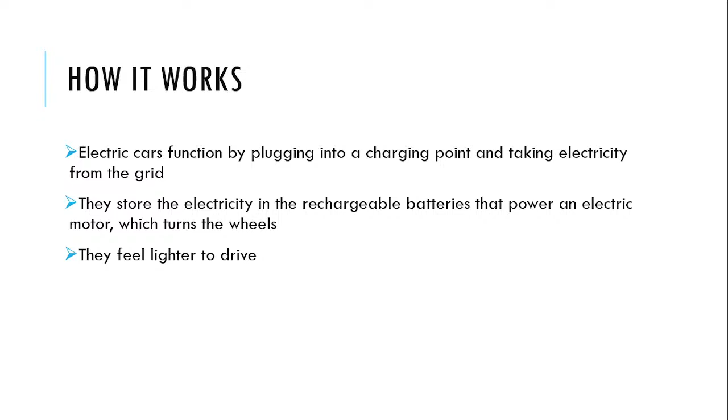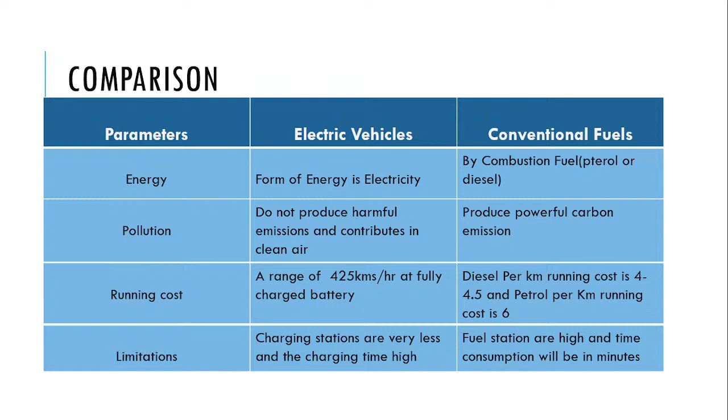Types of EV: there are basically 4 types - battery electric vehicle, hybrid electric vehicle, plug-in hybrid electric vehicle, and fuel cell electric vehicle.

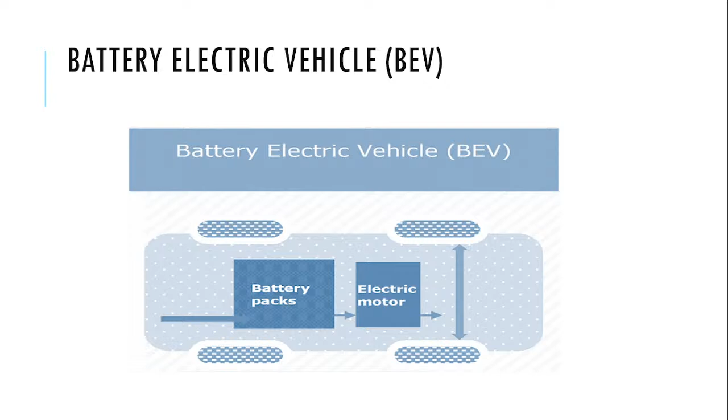This is battery electric vehicle. It has battery packs and an electric motor. Battery electric vehicle is also known as all-electric vehicle. It runs entirely on battery power. Electricity is stored in a large battery which is used to run the electric vehicle, and the electricity can be applied to the motor and used to rotate the wheels by the controller. The battery pack is connected to one or two motors in the vehicle.

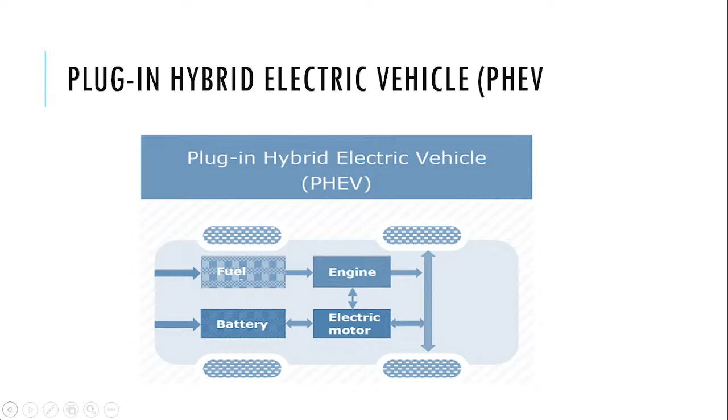This is plug-in hybrid electric vehicle, also known as series hybrid. It has both an engine and a motor. You can choose among fuels such as petrol, which is conventional fuel, or alternative fuel like biodiesel. The battery can be charged externally.

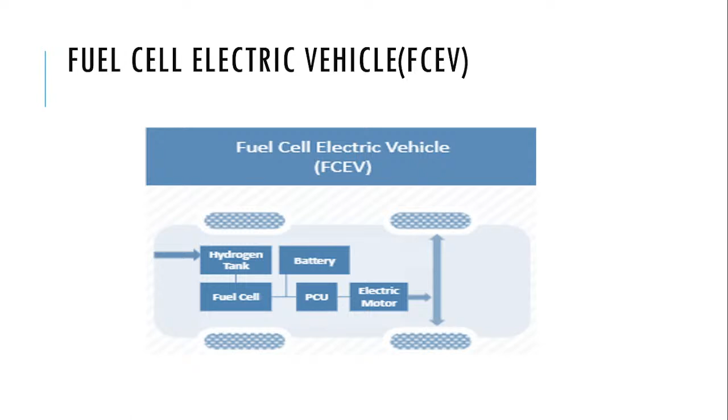This is fuel cell electric vehicle, FCEV, also known as zero emission vehicle. They employ fuel cell technology to generate the electricity required to run the vehicle. Chemical energy is directly converted into electric energy. With the electric energy, it is given to the power battery, and the battery is connected to the power controlling unit and electric motor.

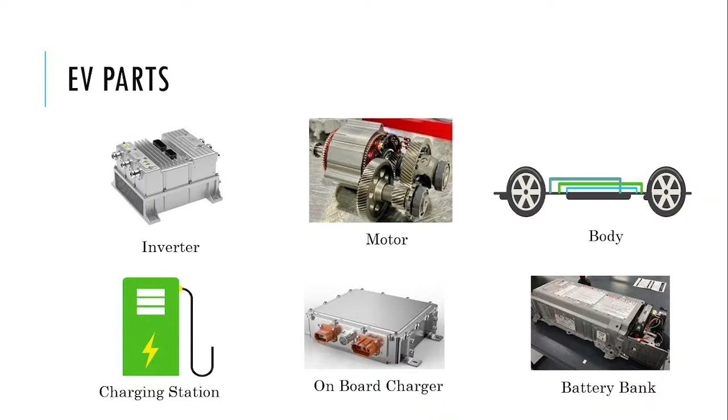This is inverter. Inverter is about conversion of DC to AC, and a motor to run the vehicle. This is the body, the transmission of the vehicle. Charging station will be connected to the onboard charger and the battery bank. From the charging station to onboard charger, the battery will store the DC energy.

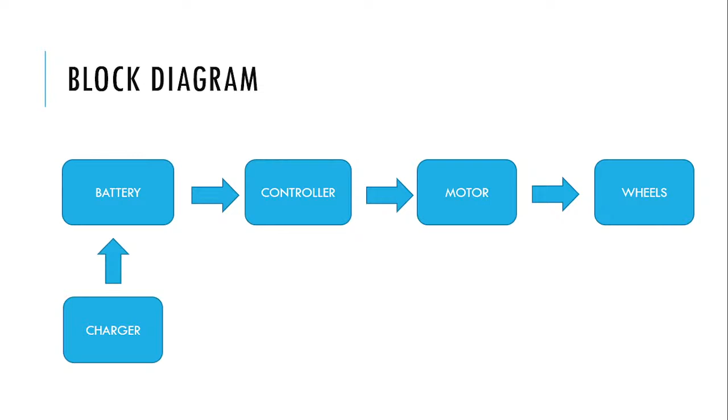This is the block diagram of EV: a charger, a battery, a controller, motor and wheels. Charger is connected to the battery. From battery, it will be supplied to the controller. From controller, we can control the motor and the wheels.

Basically, 80 to 90% in EV is power electronics. Power electronics deals with the design, control and conversion of power in electrical form. A system which converts electric energy to an electric load through a control circuit is known as power electronics. It controls and converts electric power from one form into another form.

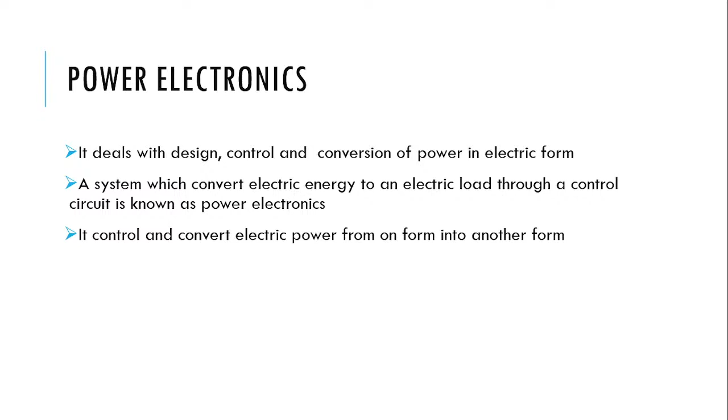Generally, there are power electronic switches like MOSFET, IGBT, SCR and thyristor. MOSFET is a metal oxide semiconductor field effect transistor. It has 3 terminals: gate, drain and source. IGBT is an insulated gate bipolar transistor. SCR is a rectifier, silicon controlled rectifier, and a thyristor.

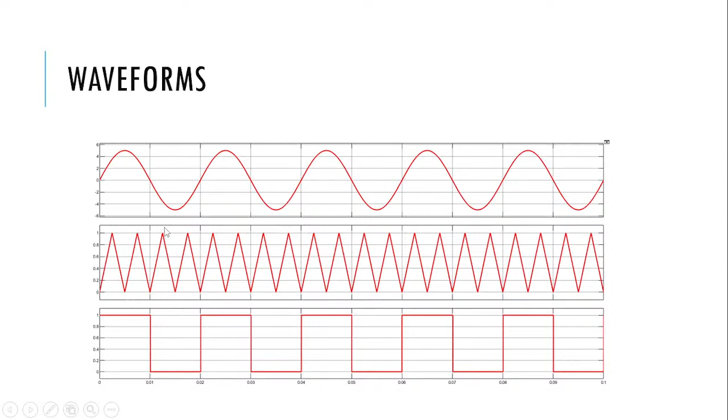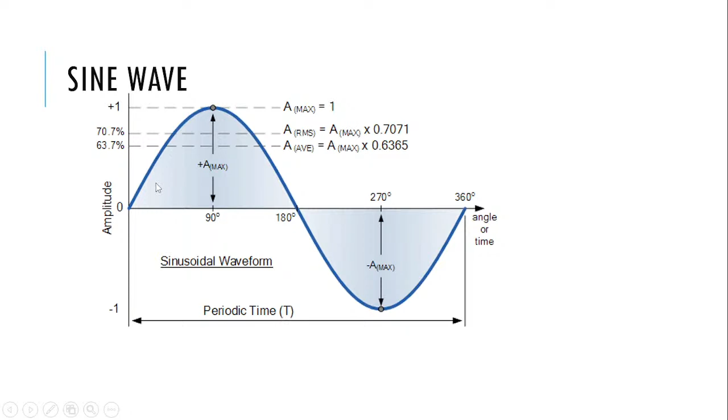This is the sine wave, also known as AC wave. The top, 0 to 180, is in the positive region, and the bottom, 180 to 360, is in the negative region. The sine wave has both positive and negative regions. 0 to 360 degrees is one cycle.

For one cycle, the time is 1 by 50. 1 by 50 is nothing but T equals 1 by frequency. Frequency is a standard frequency; for India the standard frequency is 50. 1 divided by 50 is 20 milliseconds. In most countries the standard frequency is 50 only, though from country to country it will differ - it will be 50 or 60. In India, we have 50 frequency.

Which is the most dangerous wave, AC or DC? Can anybody comment in the live chat? Can anyone say the answer - which is more dangerous, AC or DC?

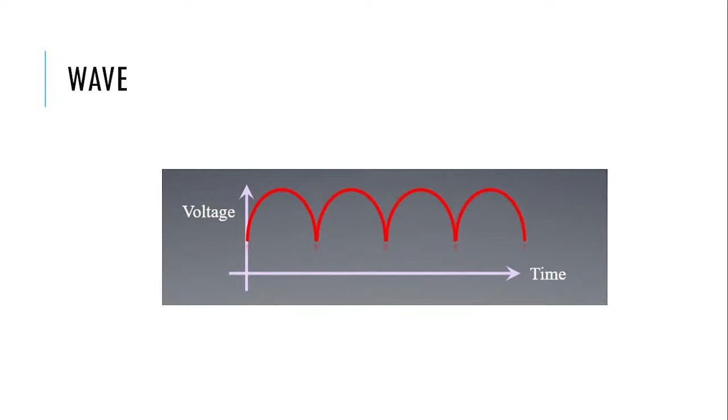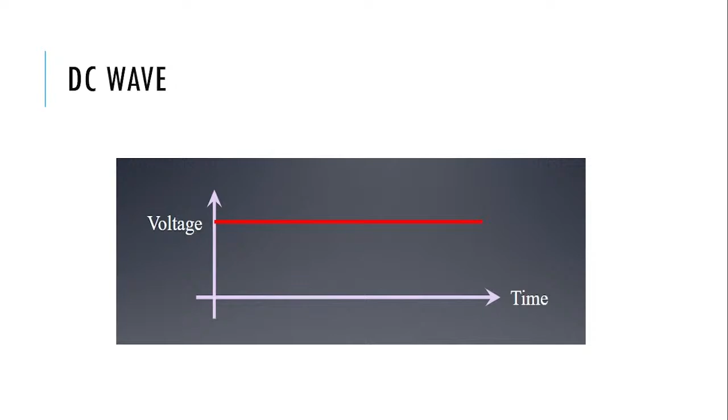In this DC wave we can easily find out the average value, but in a sine wave it is not possible to find the average value directly. For finding the average value of AC, we use this RMS. RMS is nothing but V peak divided by root 2. 1 by root 2 is 0.7071 into V peak.

Generally, we say the AC wave values in RMS value only. If we say 230 volts, it means we need to multiply by root 2.

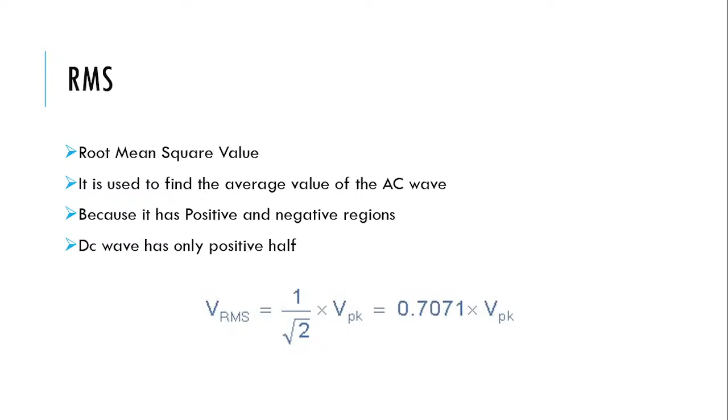The duty cycle is about the on and off time period of the cycle. If I say 50% duty cycle, it means 50% on and 50% off. If I say duty cycle 25%, it means 25% will be on and the remaining 75% off. If I say duty cycle 60%, it means 60% will be on and the remaining 40% off.

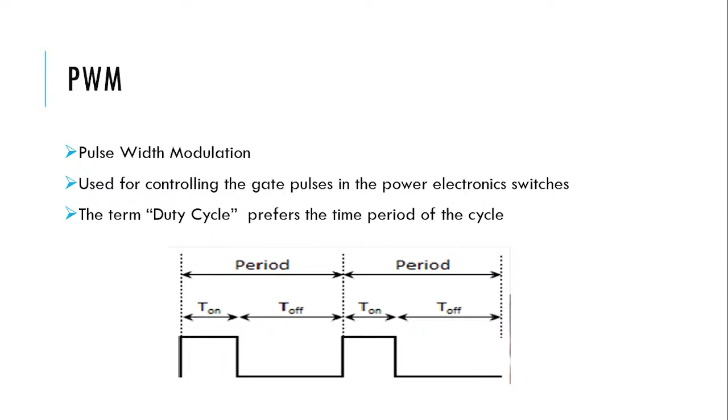Okay, this is 50% duty cycle, meaning 50% is on and the remaining 50% is off. 75 means 75 on and the remaining 25. PWM will be mentioning the duty cycle in percentage value.

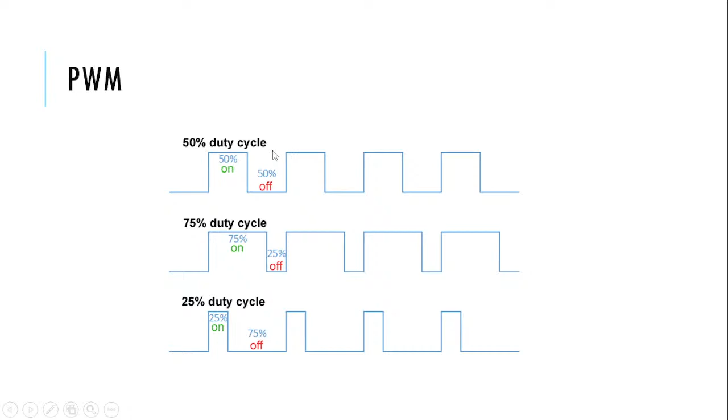Okay, in power electronics there are some basic converter applications. These are the basics: rectifier, inverter, and DC to DC chopper. Rectifier is nothing about AC to DC conversion. Inverter is DC to AC conversion, and DC to DC chopper is...

These three will be used in the EV, but the inverter and the DC to DC chopper are used the most. We will be seeing how to design an inverter, how to design a single phase inverter in Matlab. I will see shortly.

Okay, basically what is an inverter? It is a conversion of DC form into AC form. The DC input voltage is controlled using semiconductors like MOSFET or IGBT. It has two types of inverter: single phase inverter and three phase inverter.

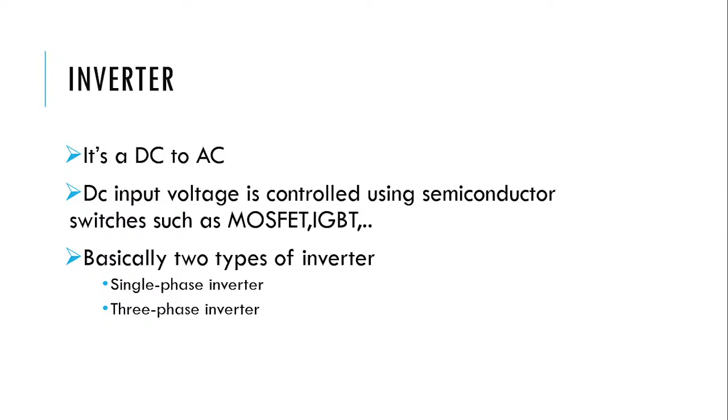Okay, why does EV need an inverter? Electric vehicle contains a battery. In the battery only the electricity will be charged. And the battery is in the form of DC. For conversion of DC to AC, we will be using inverters.

According to the EV, the motors will differ. Some EVs use AC motors, or in some we use PMDC motor like BLDC motor. For the dashboard and the flood lamp, we will be needing AC supply.

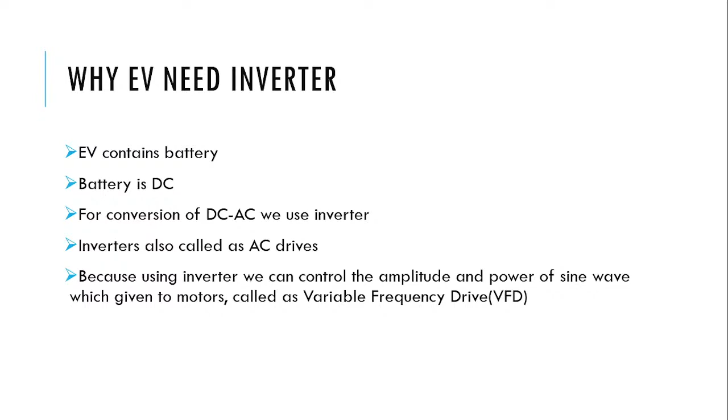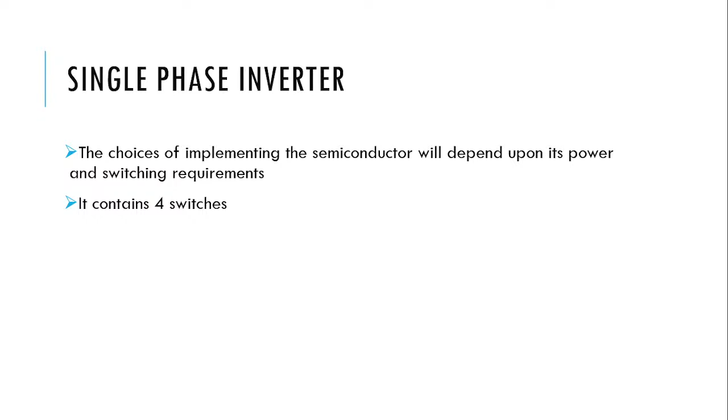When the S1 and S4 switches are on, the input will be DC and the output is AC. When the S1 and S4 switches are on, we will be getting positive. When the S3 and S2 switches are on, we will be getting the negative region. When these switches, S1 and S4, are on, we will be getting positive output. When the switches S3 and S2 are on, we will be getting negative region.

Okay, we'll be seeing this in Matlab.

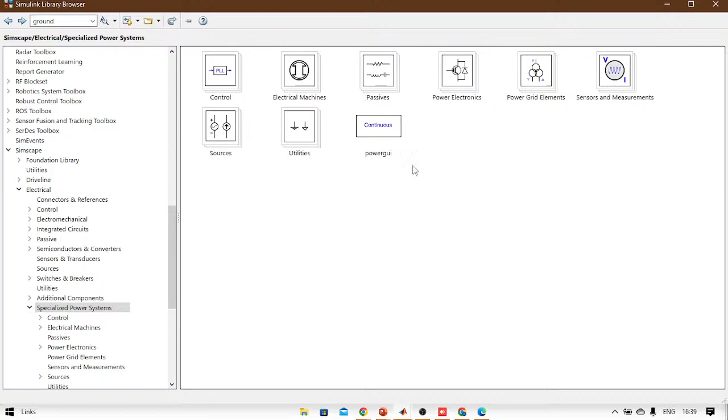And then take a voltage measurement for measuring the values. And whenever you take any equipment from this control or any sources utilities, don't forget to take power GUI. Okay, without this the Matlab will not run.

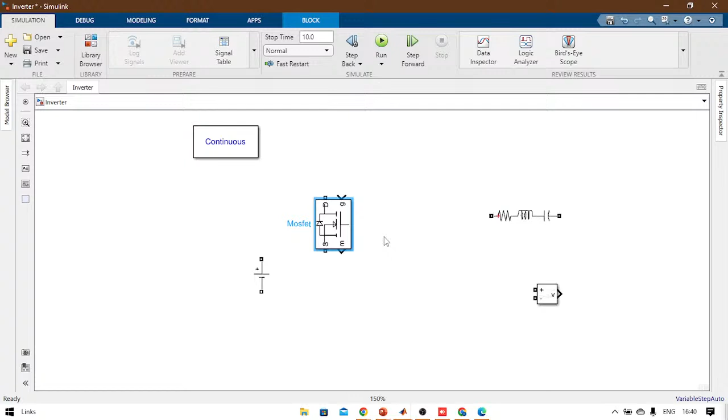Guys, is it, am I audible?

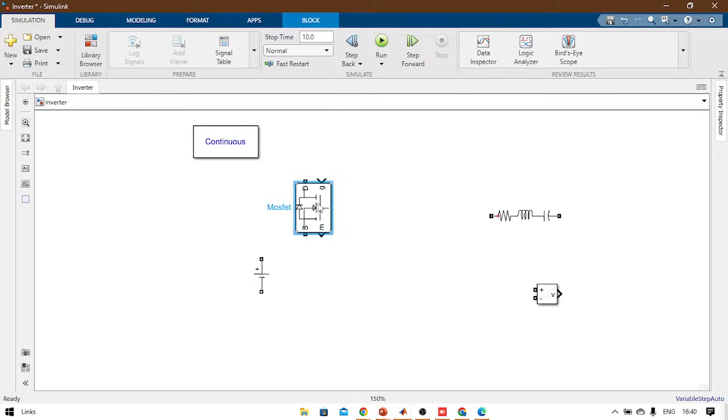Okay, by pressing Ctrl+R, we can rotate the components. By pressing Ctrl and drag, we can copy and paste the component. I will be arranging like in the circuit diagram.

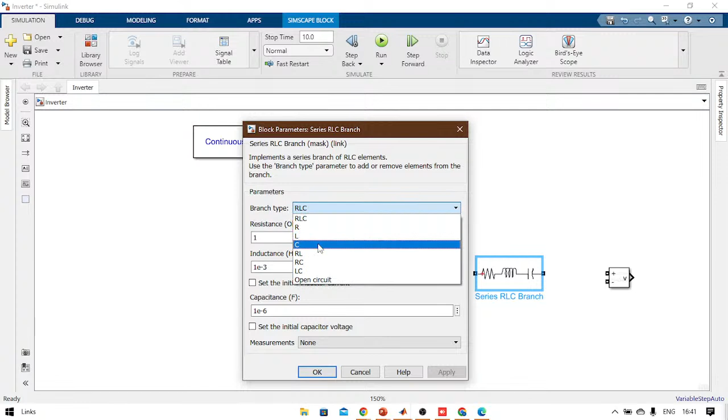Okay, in series RLC branch, double click. By double clicking, we can select resistor, inductor or capacitor. For now I need a resistor. And then in DC voltage source, connect it to the drain. Connect the negative to these sources.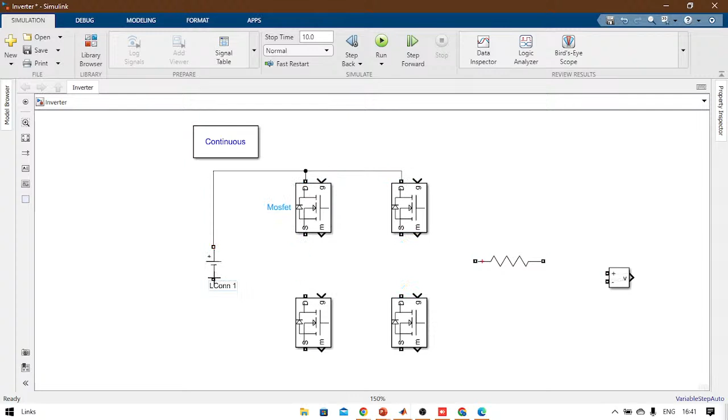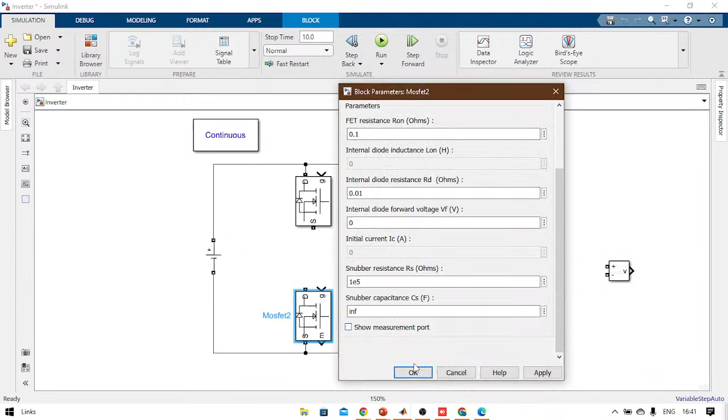Okay, I need to, here you can see show measurement port. If I uncheck this one, the E will be removed. We don't need that E. E is for connecting to the scope and checking the MOSFET values. Okay, for now connect the source and drain. Okay, connect the resistor.

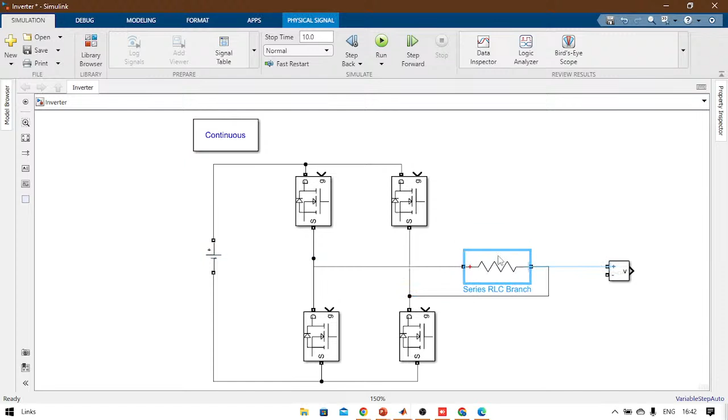Okay, in DC voltage source we can give the value as 24. Okay, this is the power GUI. For now I am removing this to show you what error will come, and I need a pulse generator. Pulse generator will be in sources.

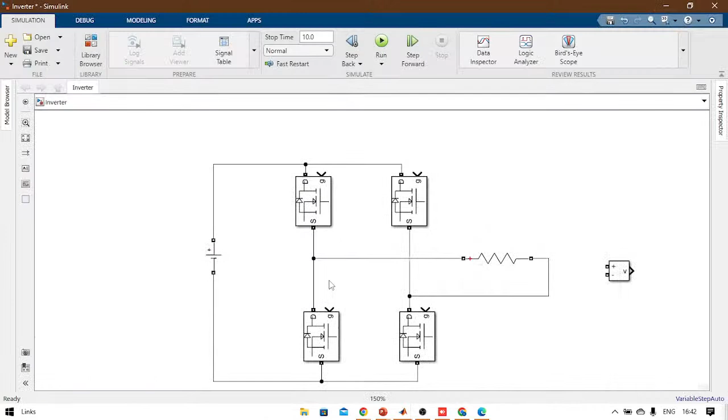Okay, only this is pulse generator. By giving the pulse we can control the MOSFET switches. Okay, this is switch 1, this is switch 2, this is switch 3, this is switch 4. Okay, I will be renaming it.

Switch 1, this is switch 2, this is switch 3, and then this is switch 4.

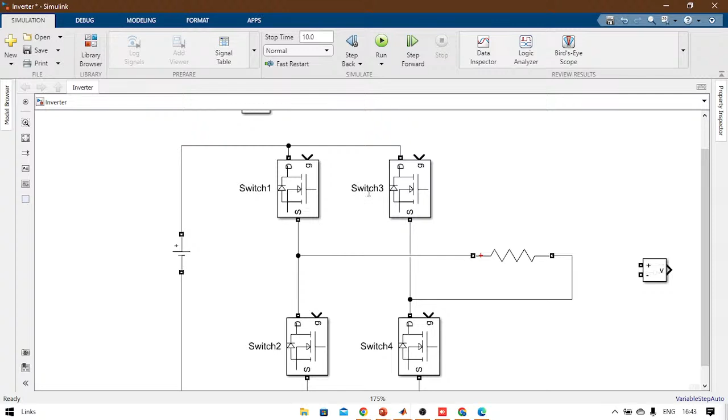Okay, I will be giving the pulse generator for all the switches. For now I am giving the pulse generator to switch 1. Amplitude is about 1, and the period is nothing about 1 by F. 1 by F should be mentioned in seconds, so I am giving 50 equal to 1 by F. F is nothing but a frequency. Pulses you can give according to that pulse width.

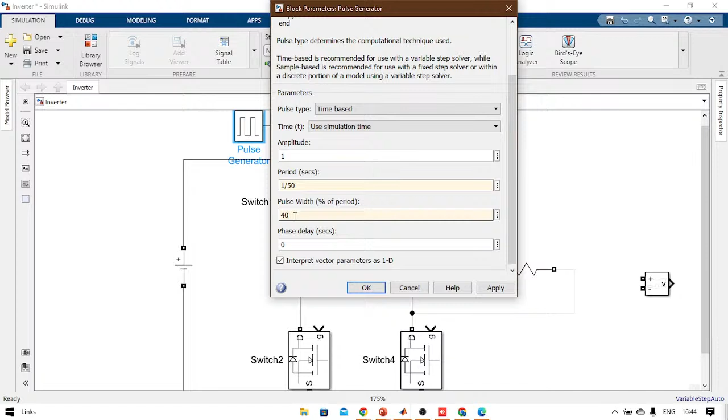You will be controlling the on and off time. For now I will be giving 40. For switch 1 and switch 4 it should be same only, so I will be connecting switch 1 and switch 4 to the same pulse generator. Okay, for switch 2 and switch 3, drag, press control and drag, it will copy and paste.

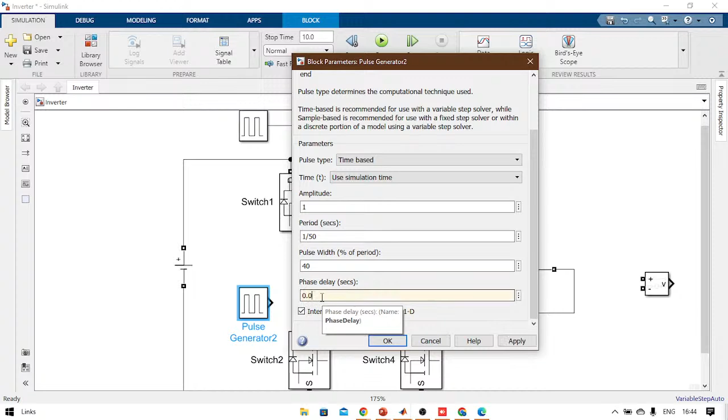We need to change the pulse phase delay. It is nothing but half of the period. Okay, 0.01. Okay, connect it.

Now we need to see the value. For that I will be connecting the voltage measurement, and I need to take a scope block. It will be in sinks. In scope we can see the output.

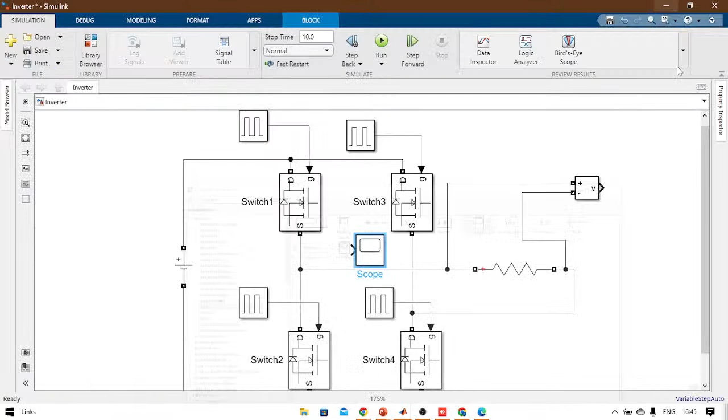Okay, connect it. When you press this is the time here. When you enter any time, it will be seen in seconds.

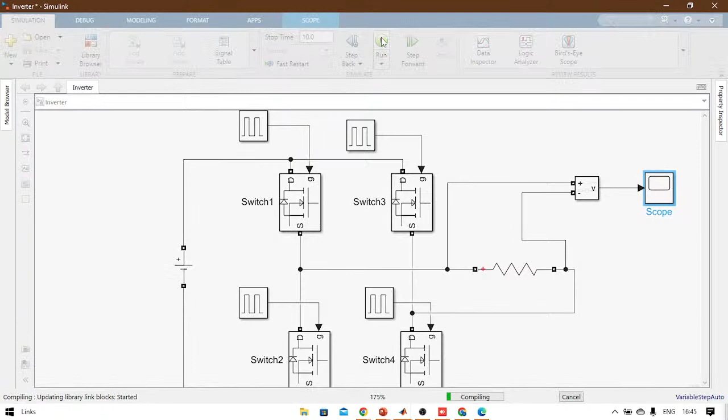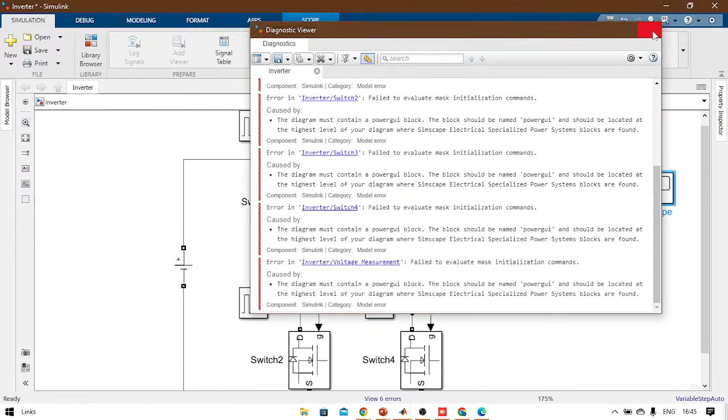Okay, when you press run, it won't run. Okay, you will be getting an error. This is because we removed the powergui block. Okay, we removed this block. Okay, now you don't need to connect it, just place it there and now run.

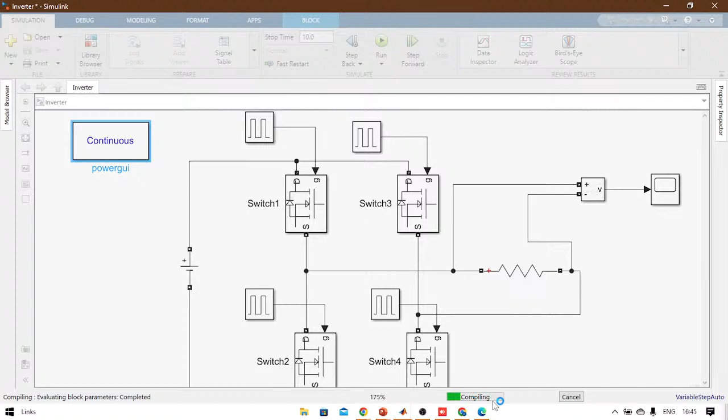Here at the bottom you can see the compiling time. Okay, once it's compiled, double click the scope.

You can see the input value I gave, 24. I was getting the output like plus 20 and minus 20. It won't be a perfect sine wave. For that, there is a concept called multi-level inverter. To achieve the perfect sine wave, multi-level inverter is used.

I will be comparing the input and the output to show the difference. Let me arrange this.

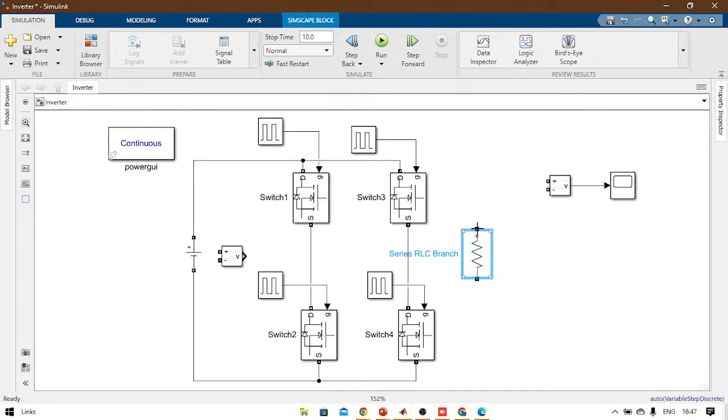Okay, you can press here and combine the two scopes. I will be giving this to the input, see the voltage level and connecting it to the scope.

Okay, now press the run button and you need to do some modification in the scope block, because now I entered two values. Here in this settings, go to the third option and select 2. You can select horizontal or vertical.

Okay, when you click you can see, just restore the value. You can see the top one is input value and the bottom one is output. You can see a plain line. This is the input value 24 DC, and the output we are getting is in AC.

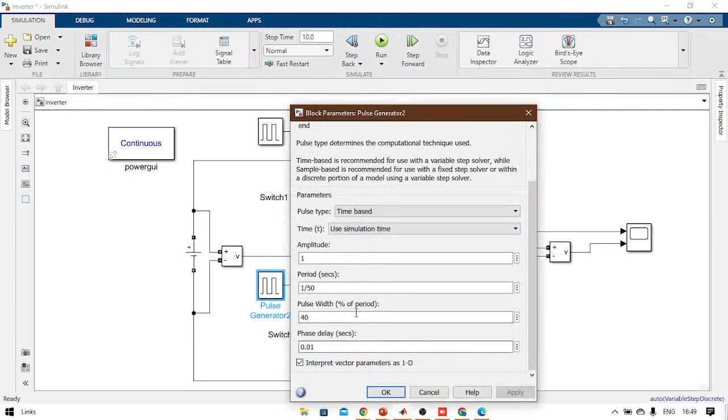I will be changing the pulse width, like I was entering 70, to show you the difference how the single phase inverter works. And I change the pulse width. I will be giving 70 to all the switches and click on run.

Now you can see the waveform is changed a little bit, like the on and off time is different. Before I gave 40, now I changed it to 70.

Okay, I will be showing you how pulse generator works. I will be giving the period as 1/50 and the pulse width as 70. Okay, now run it and see in the scope.

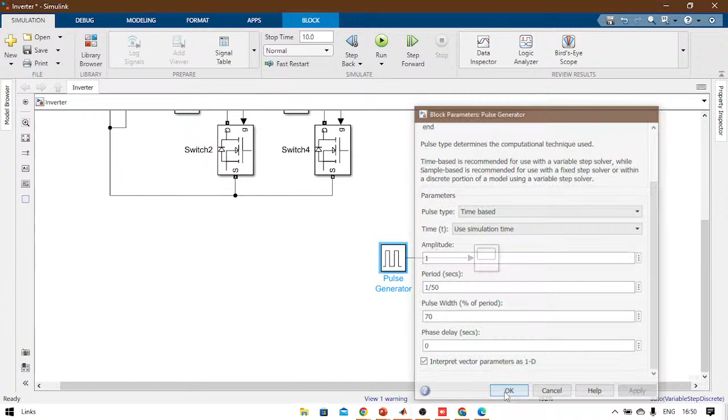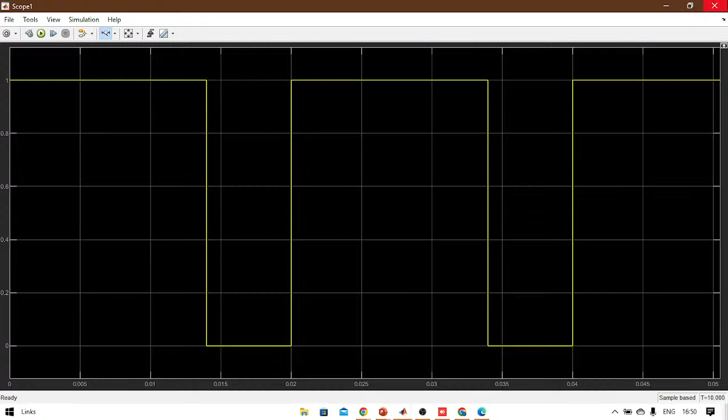Okay, here you can see it is on for 70 and off for 30. 70% it is on and 30% it is off. If I change it to 50, it will be 50 on, 50 off.

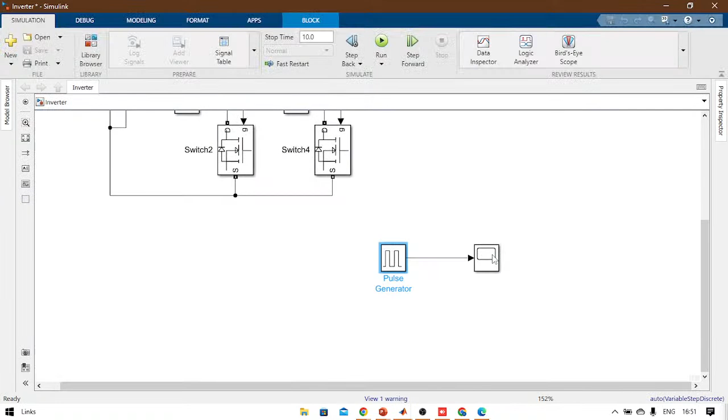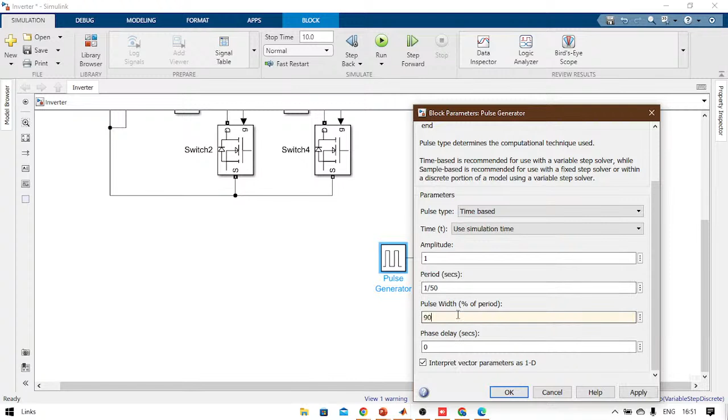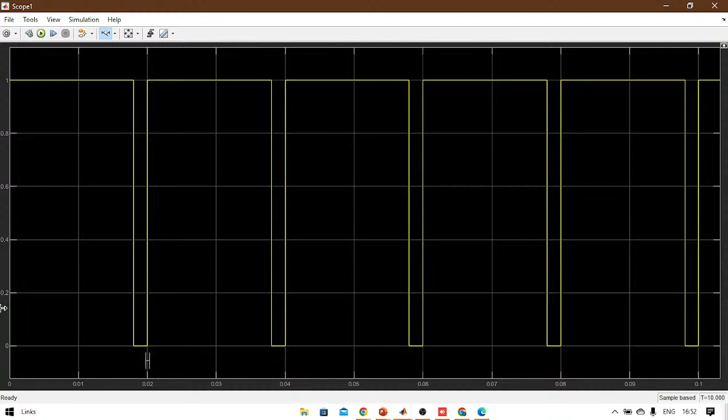If I give 90, for 90% it is on, and for 10% it is off.

Okay, Srikanth, ready? Now is it clear?